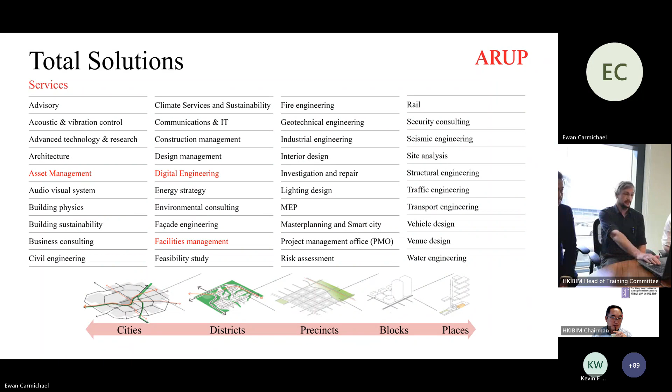But delving into the digital side, we don't just do things in the BIM sphere, we also do other stuff. Just talking about the BIM sphere, we offer services both internally for our projects—BIM manager, CDE setup, managing models—but we also offer our services as a consultancy or advisory service to clients. We've worked with clients to set up their standards and document all their information requirements. So we cover a broad range, start to finish, of projects.

As a BIM advisory team in the region, there's quite a few members across different offices. Ray, who's based in Hong Kong, is the lead. Myself, I look after the Hong Kong office. Wbi in Ho Chi Minh City, Wet in Bangkok, and Edmundo in Manila. We work together quite seamlessly and share responsibility on different projects.

As Kevin said at the introduction, I have been working on Thailand projects. For example, one of the big projects we worked on was a high-speed rail project, which Ray led. Myself, Wbi, and Wet also were BIM managers in different packages of that high-speed rail line. As you can see, we offer quite a lot of services.

On top of this, we have a global BIM skills network, which Ray taps into, and this is where we share global best practice. Actually saw Rishi, who's the Australasia lead, join this call as well—so hi, Rishi. We tend to share best practice, and from that global skills network we disseminate global initiatives, like our global Revit standard and other things. So it works quite like a seamless global initiative.

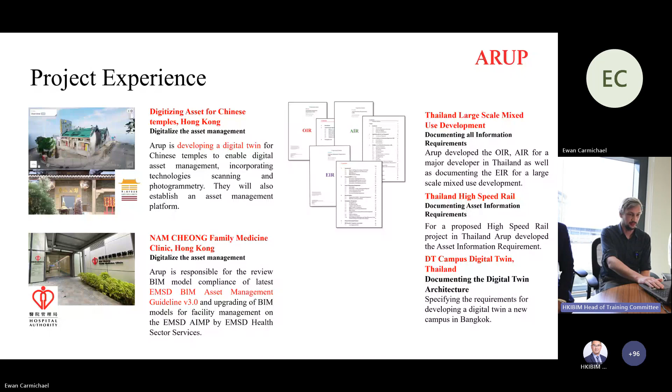For the DT Campus Digital Twin, our client is looking to develop a smart campus. But for that, we need to make sure all the requirements are set up correctly at the start so that all the asset information is passed on into the operation seamlessly and everything can link up. So that's our role in that project as well. We've been busy with regards to asset information for sure.

Finally, I just want to introduce myself. I'm Ewan Carmichael, a senior consultant focusing on BIM. I'm also a chartered mechanical engineer, chartered with IMechE as well as the HKIE. I'm also a professional member of this institute, the HKIBIM, and also a certified CIC BIM manager. As Kevin said at the start, I've been a BIM manager for a number of years now, working on large infrastructure projects, including the BHS APM tunnel just behind me at the airport, but also the Siu Ho Wan depot development and MTR Tung Chung line extension.

But I think the thing in my experience that helps me talk about this sort of stuff is that in the UK, I worked for 4 years on a nuclear power station as part of the maintenance and operations team. So I had firsthand experience of having bad data, not being able to understand what things are or what they're linked to. I will try and share some anecdotes throughout this presentation about where things can go wrong and why, and the implications of not getting it right.

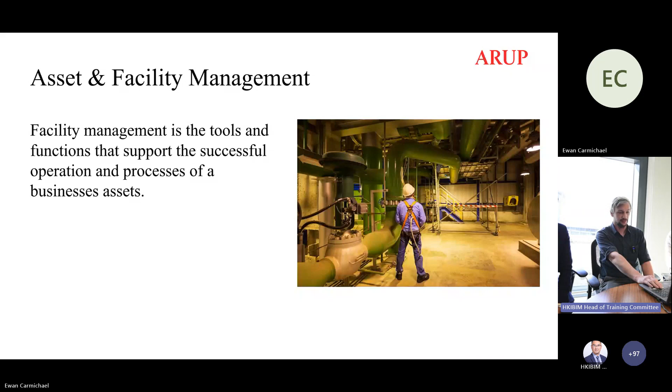To start us off for the actual topic today, I thought I'd start at the reason why this is important, why we want to make sure all these models are in line, and it's to do with facility management. So facility and asset management—the purpose of them on any project or building or asset is making sure it works, making sure things continue to operate as they are supposed to. This can be either hard facility management, like this man inspecting a pumping system, or it can be soft, like cleaning. So there's a variety of different things facility management teams do, but it's a very important role in the operational side of buildings and assets.

Some of the typical day-to-day tasks that a facility management team will carry out include routine inspection of important assets. So things like making sure the pressure of a pump is within range or within the allowed pressure range. That's the sort of thing they would do on a day-to-day basis. They would record this and store it in a secure way.

But they also carry out routine maintenance. Every piece of equipment will have a manufacturing spec. In that spec, it will tell you the seals, the fan, or certain parts of an asset need to be maintained at a certain frequency. This will be associated with a working schedule for the maintenance staff, and this is where spares come in as well—making sure your spares are in line and available for when that maintenance happens. So it's quite a lot of interlinking operations, and it's quite important to get it right.

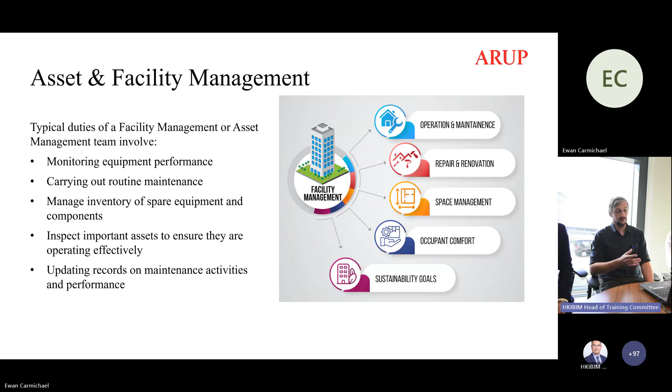So what was it like back in the day? My role on site was about 10 years ago, so it was kind of halfway to becoming digitized, but I still had to go into the archives, find the shelves of binders where drawings, specifications, and operation manuals were kept. But it did highlight to me some of the problems with it, in that you have a lot of different documentation produced at different times by different people, and sometimes the naming convention doesn't follow through. So you'll have pumps named 4 times in 4 different pieces of documents, and they're not linked. So it's very hard to specify work efficiently because you don't know which piece of information is correct.

Another thing you'd usually have to do back in the day, which you still do now but more manually, is checklists. So when you go on site to inspect, you have a checklist. You check things are right, check things are not right, and that gets filed in one of these binders. But the problem is, if a piece of equipment is bordering on the tolerance of its operational performance, if that happens one week, it's recorded and put in the binder. Next week, the same thing happens when someone else does the same check—that gets put in the binder. Third week, same thing by someone else.

And then the fourth week, catastrophic failure. So the whole point of digitizing allows all that information to be gathered, and you can see trends—you can see why things might have a failure. And this is what leads us on to things like preventative maintenance. I'll talk about that a bit more, but this is the thing we're trying to improve by digitizing assets, or digitizing the facility management process.

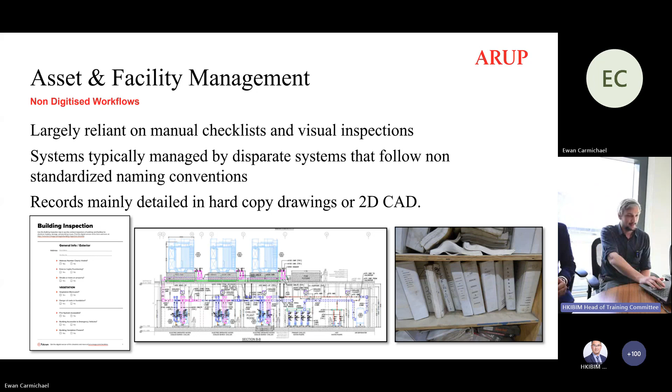But what is a digitized workflow? So the project or the work I did on site, that was half digitized. They'd copied a lot of the manual entered stuff, the drawings, into an online facility management system.

But what I want to try and promote at the minute is something that's completely digitized, something that was set up from the start, that has a single source for every asset in the database. So you have a database of all your assets, and all the information is associated with that, including drawings, specifications, maybe hyperlinks to other storage locations. But that's much more clean and much more easy to use.

Then you get to digitized checklists. So workers on site with an iPad checking off inspections, so that you can amalgamate the data, as I said before. You can see insights, you can see trends, and you can make more informed decisions. You can even automate the interventions by stopping plant if you know things are going to go wrong.

And then on top of that, you can have IoT sensor data telling you at any time how different systems are operating together. This is when we get into digital twins and even smarter maintenance platforms, and I will talk about them later. But that's where we want to aim, and that's why we try and digitize the information up front when we're doing our design and construction, and that's what gets handed over.

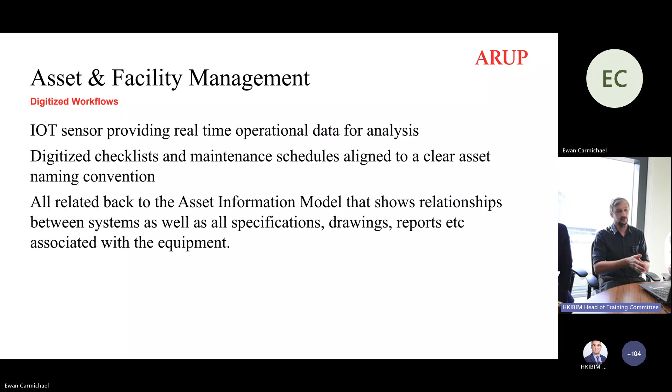So I have an example that I'd like to share from EMSD. So let me just share a different screen. It wouldn't let me embed this video, so it has to be here.

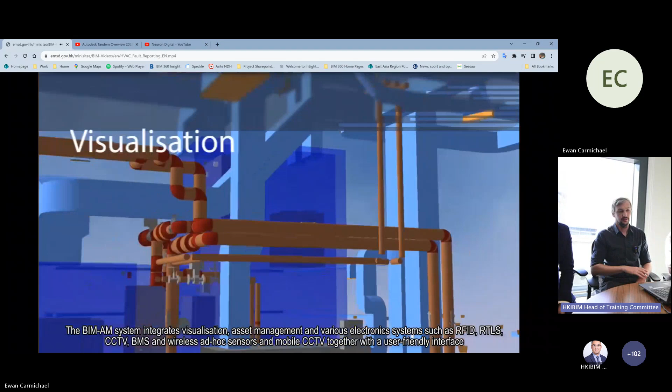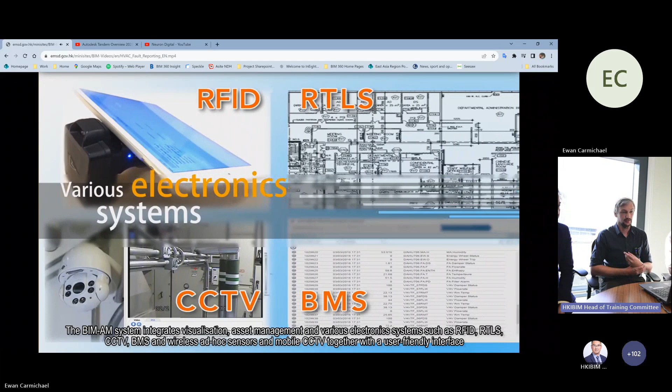So this is the EMSD BIM AM system. I quite like this video because it shows the before and after, and it allows us to see the difference between a half digitized system and a digitized system. But basically their goal is to try and digitize all their workflows, and they have a system set up to upload all this information into the cloud. All of these things are meant to be connected at the end.

So just skip to this. This is an example of the fault reporting, handling, and monitoring process. This is where an operational staff member goes to site, finds a problem, and reports it.

So your facility maintenance staff notices, during a site walk of the facility, that one of the HVAC systems is not working. Previously, she'd have to phone up the help desk. They would record the information, but now because everything's digitized, she has everything to hand. So before, when she phoned up, there might be an error in telling her what exactly might be wrong. Now it's all either voice input, or you have much more standardized faults, things like this. So it all becomes a bit more seamless.

Fill in all the information, take a photo, so there's more clarity of where the contractor will eventually have to work. This is then passed to the same sort of staff, but now it's all digitized. It's quite clear, and it can be automatically assigned to different rooms for different contractors to work on. Whereas before there was a lot more manual input and then a fax to job assignment for the contractors. Then the job assignment person would phone the contractor to assign him to the task.

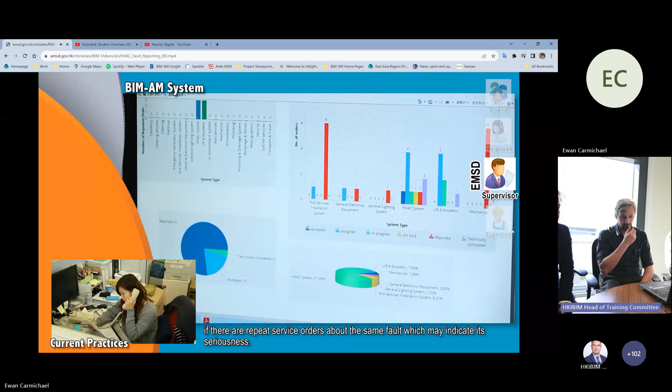But with a digitized system, like I said before, you can check analysis, check trends in certain systems that might be failing more frequently than others, and you might be able to find the root cause of that problem. And then also it gives a bit more transparency. The system allows the facility maintenance staff to understand whereabouts in the process their request is, so they can understand when it might be fixed, who's assigned to it, and the status of the job.

So yeah, basically this is a fully digitized asset information system, and everything will be assigned to specific assets in the cloud. Let me just go back to my slide deck.

So we talked about the why, but I guess the question now is, how do we get the asset information from our design construction models into after handover onto the facility management? The tool we use is the asset information model. It's a collated set of information gathered from all sources that supports the ongoing management of the asset, so anything required to maintain and operate has to be in there.

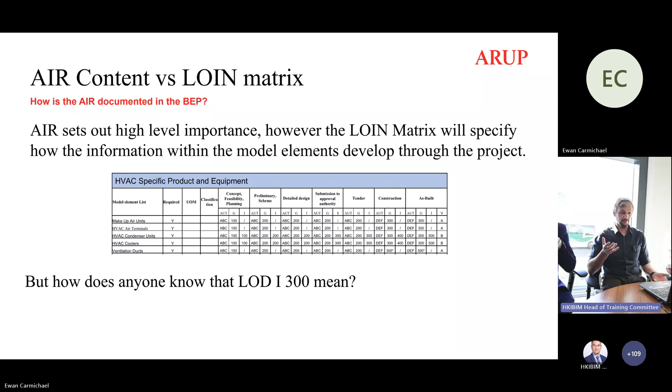Take the example of the HVAC coolers. At tender, LODG is 200, LODI is 300. Now, LODG is a more understood term in the industry than LODI. Most people understand LODG 200 as an approximate shape, approximate location, but in the right system or something like that. But LODI 300, what does that even mean? There is a sample in the BIM standards of what an LODI specification could be, but I've seen these

copied and pasted into BEPs before, and they are not specific for projects, so they're not very useful. For example, the HVAC coolers LODI 300 specifies that the Omni-class code title and version need to be applied to the elements in the project. Now, if the project or the client isn't even using Omni-class, what is the purpose of filling it in? It's a complete waste of everyone's time and money.

So my recommendation is if this is applied or this is in a BEP, challenge it. But also, if clients want to make sure that things are right for their uses of BIM, be it quantity takeoff, carbon assessment, operational information, then make sure this is filled in. You have an LODI specification that makes sure you get the right information at the right time.

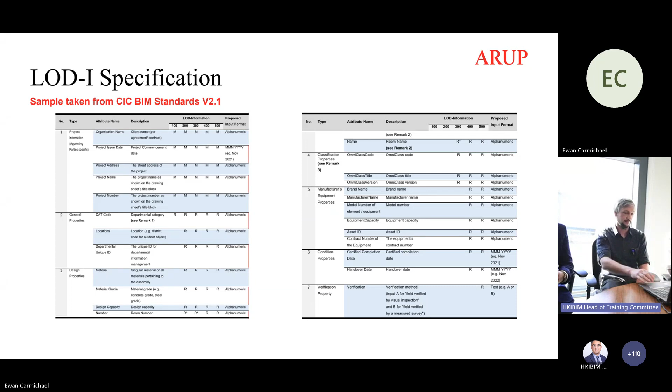I'd like an example from EMSD that highlights another wrinkle in this. In the EMSD BIM asset management guidelines, specifically Appendix E, it goes into detail about how Revit elements or Revit families should be put together for certain assets, for different things, but for this example it's the air handling unit. It specifies that different components within the air handling unit should be separate families - your energy recovery, your cooling coils, your fans, your filters, this sort of thing.

But that should also be reflected in your LOIN matrix, so that you can define exactly when the information gets expanded on. Because ultimately, this might not need to be done within the design phase - it might only be that the contractor needs to pick this up. So you can use the LOIN matrix to communicate that to the different teams. You could also, for things inside the machine, possibly use families that are only 2D information, but have an LOI that's appropriate for asset management. So there are various ways you can get around it.

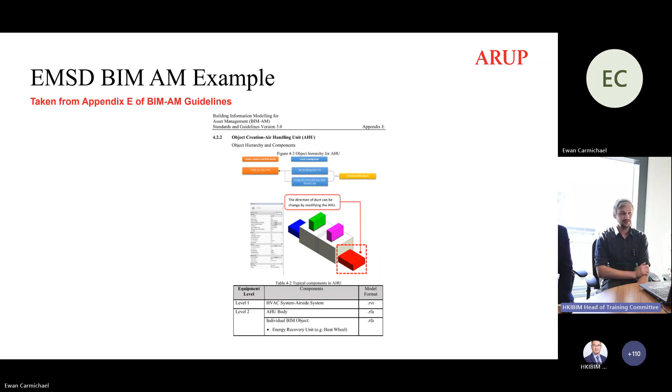But as I'll get onto, the EMSD guidelines are quite specific about how they want things to be built. On the flip side is the ArchSD's BIM guidelines - again this is version 3.0. They have a similar asset management requirement.

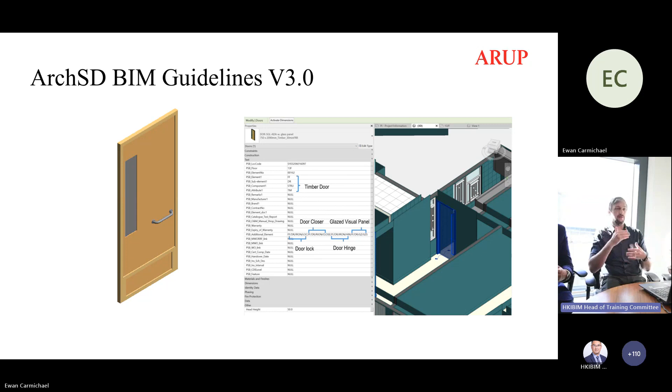And so when you break down a door, do you need to record an asset code against the door handle, the glazing, or the lock? According to the ArchSD's guidelines, this information can be added as parameters - asset information - rather than a separate asset in its own right. I like to think of this as a good counterpoint for when you're specifying asset information requirements - have a think about what you specify as an asset. Do you specify your air handling unit as one asset, with parameters that specify the different components? Do you split it up into different assets and different families, or do you do what this door example does, and just have one asset with a multitude of parameters?

Obviously a balance needs to be had, but you also need to have an idea of what your teams maintain on site. Is the fan inside the air handling unit important enough that it needs its own asset number, so that you can record maintenance or operational performance against it?

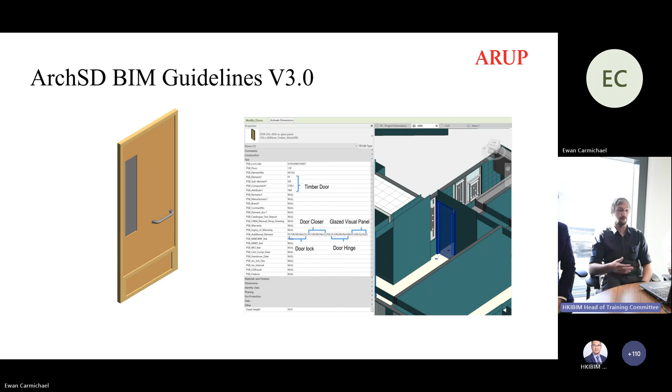So there's something I want to cover now. It's quite a common thing to see when talking about asset information management, and it's COBie. And no, it's not this guy. It's actually got nothing to do with him. It's this: Construction Operations Building information exchange.

So this is a classification system for assets that was developed by the American Army when they tried to understand their entire estate in terms of what they have. Because it's very, imagine the size of it, they needed to have a system, so they developed COBie.

The problem with COBie, or the problem that I have with COBie, is the way it's specified on projects, because people just ask for COBie. They don't tell you what assets you actually need to apply COBie to, to get the best out of it. So as I say here, it's not a replacement for an AIR. It's a good classification system you can use in an AIR, but it cannot be a replacement of it.

But to go a bit further into client responsibilities, we've worked with a few clients on this sort of thing, about when to specify AIRs. And quite an important thing to consider is the timing of the AIRs, because in the projects we work on, a lot of the time when we have the kickoff meetings, they say, okay, we want you to write the AIR.

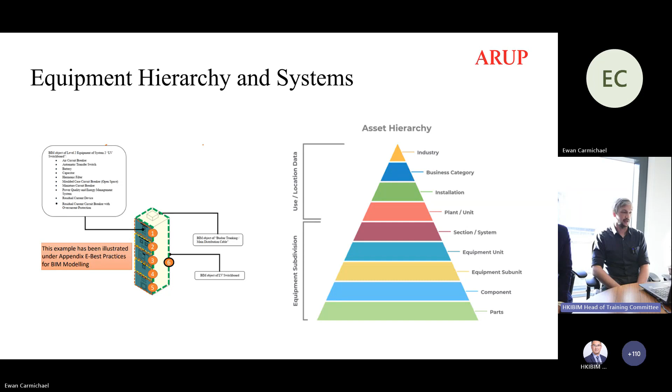So at this point, I'd like to talk through the EMSD guidelines. We've worked a bit with it, and I want to try and share some experiences and some things to look out for if you have to align or produce models in line with these guidelines.

So version 3.0, it was released, I think, last year - 2022, sorry. And it covers a lot of things, like modeling standards, asset relationship instructions, and asset information model upload instructions, as well as all the codification and classification things you would expect. Some things to watch out for.

The system configuration has to be set up with your folder structures so you contain all your information, that you zip it all up and upload to the system. It all has to be in line with what they say, otherwise it doesn't go into this thing called the Asset Information Management Platform. It's quite a specific way they like to organize it, and information gets shared amongst different platforms as well. So if it's not right, things might go into the CDE correctly, but then it might not get taken out into the other systems correctly. So they're quite specific about it.

Also, the Revit families, as I said before, they are quite specific about the way Revit families need to be, and for most things they do consider assets at a sub-component level. So for the AHU, you have to have Revit families for different things. For the electrical panels, you have to have racks as individual components. It might make sense if you think about it, because in the racks there might be different components for different systems, like power and comms. So it makes sense, but it's very rare that you see a model built that way. Something to keep in mind.

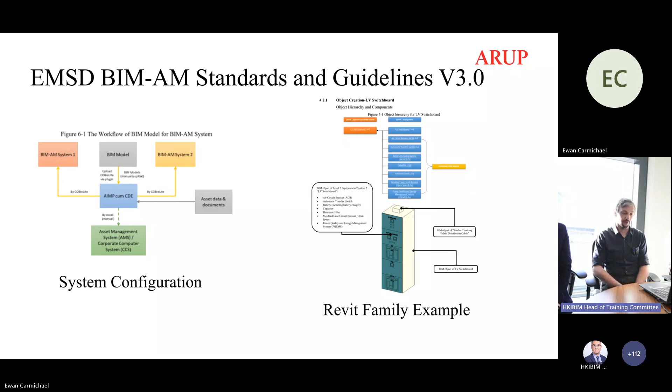So I'd like to discuss the difference between the project information model and the asset information model. A lot of times when we get to the end of projects, it's not really specified what needs to be handed over, so everything just gets dumped and handed over. Whereas what should clearly define the difference is: the PIM is all about what they need during the project delivery phase. So this might be your native models, your calculations, drawings, and things.

Once that's handed over at the end, it's still a project information model - it can be archived and reused if there's any A&A works, for example. Whereas the asset information model should only contain information in relation to the operation phase of the asset. That can include 3D information - it doesn't have to, but if you give a Revit model that has all the asset information in it, whose responsibility is it to strip out the relevant data from that model to use in your systems? It needs to be clearly defined up front in the asset information requirements and the exchange information requirements - what is the format of the handover information for both of these? Otherwise, you'll just end up having to do rework yourself to get it into the system correctly.

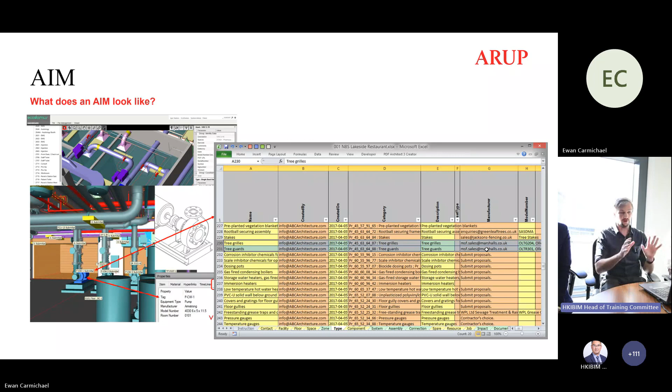So what does the AIM look like? I'm sure you've seen sort of gimmicky 3D model perspectives where you click on equipment and it pops up all the asset information, all the specifications. That is an asset information model, but it doesn't need to be like that - that's not the only variation. It can just be like you can see here, which is a database, just a list of assets and their associated information, as well as hyperlinks to specifications or whatever it might be. Both are an asset information model.

Yeah, and as I said, it doesn't have to be 3D. It doesn't even have to be 2D - it can just be asset relationships in a database. But the important thing, again, is it has to contain all of the information that's required to maintain and operate the asset.

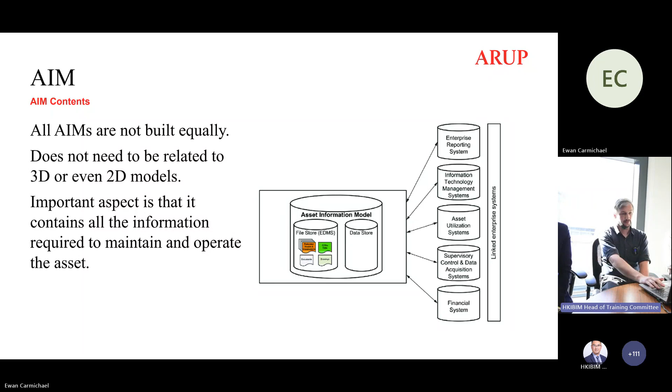One of the reasons why I wanted to do this talk was to talk about the golden thread of information. This term came out because an independent review was conducted after the Grenfell fire in the UK—72 people died when a tower block went on fire. During the investigation, they found a lot of the information that should have been maintained, regarding material properties of the cladding, fire, and the state of the fire extinguishers, wasn't recorded or kept. So people living there didn't have access to this information, and neither did the emergency services.

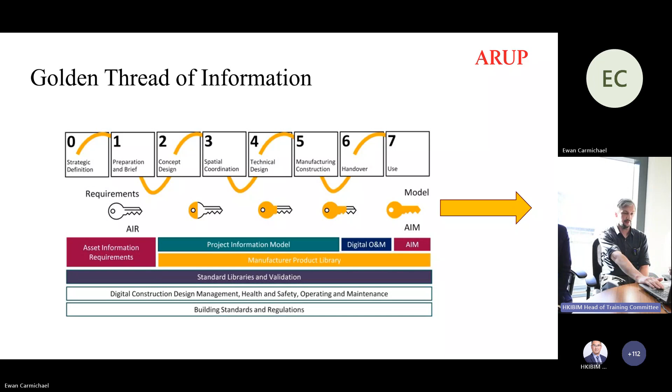This is just a diagrammatical representation of the golden thread of information. So after the model is handed over, the information should still grow along with the changes to the asset information model.

Just to clarify a few points about responsibilities: the client is responsible for documenting the AIR pre-appointment. Obviously if there's not enough information, they can redo it for the pre-handover stage. They can delegate this out, contracting someone to write the AIR for them. Then during the pre-handover stage, the delivery teams are responsible for updating the asset information in the models, in line with the LOD specification, so that the handover is successful.

The client is also the responsible party for checking the information in these models is accurate. They can obviously delegate this out. We've done this role as BIM auditors on projects, and it's a very onerous task—I don't think it should be taken lightly, and that's why I highlight it here. But if you get handed over a model as the client and you don't check it, and then try to load it into your system, the contractor's gone, and you're left with a bunch of information that's not very useful to you.

Then during operation, again, it's the appointing party's responsibility for the upkeep, maintaining this golden thread of information. Any alterations to the asset information model can be done by the owners and operators themselves, or it can be contracted out again. That becomes the PIM, and they update it and then hand it over, and that can become the AIM again.

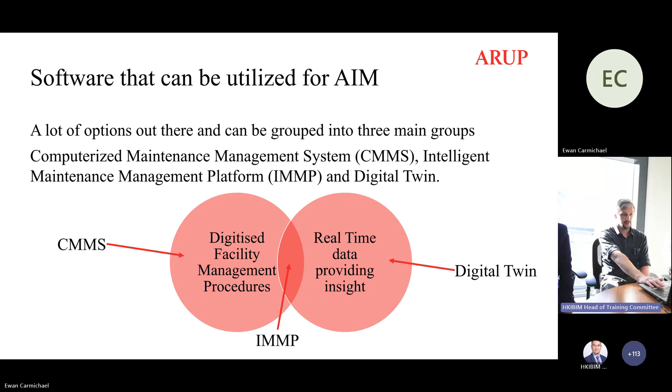So it's just a diagrammatical way of representing them. I'm just going to talk about a few platforms now.

EcoDomus, I'm sure a few of you have had experience using. They've only recently been bought over by Siemens, which I didn't realize until I started preparing this presentation. Essentially, it's a digital twin platform, but it does have good interactions with CMMS systems - the APIs talk together quite well.

You can upload BIM models, IFC models directly to the platform, and it does accept COBie data structures as well. So it's quite a useful platform if you want the 3D visualization.

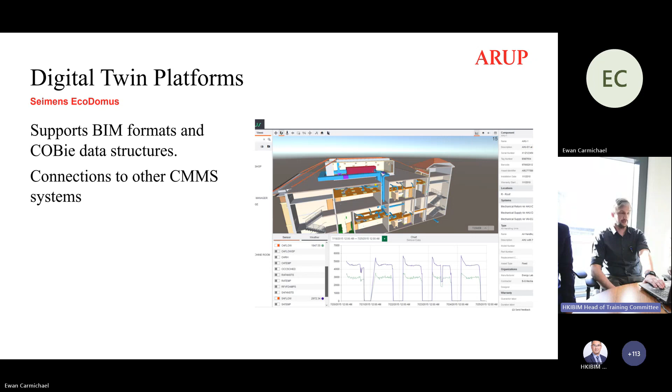Other platforms include Autodesk Tandem. Being an Autodesk product, it's very good at handling things like Revit, also via BIM 360. So it's quite good at

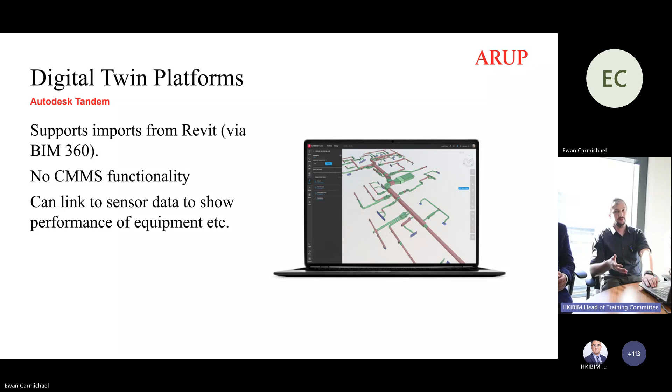accepting those sorts of information, but it doesn't have any CMMS functionality, so it's hard to use it as a facility management system. It possibly can be used as asset management. But they have recently linked it to operational data, sensor data as well.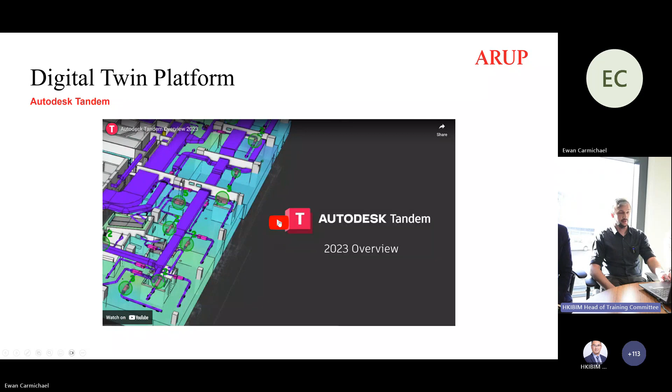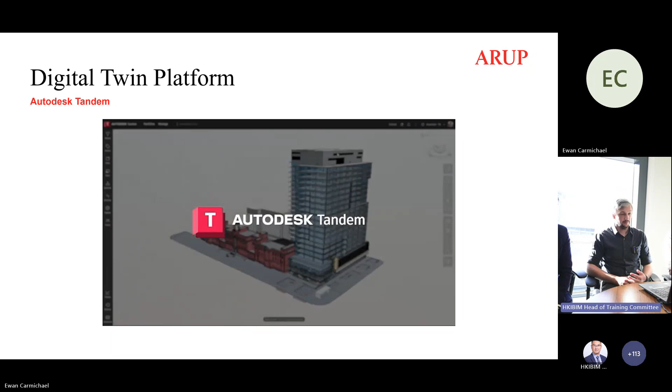Just a quick overview of what it can do for those who don't know. For those who actually have the AEC license for Autodesk, this is included in it, so you can upload models and have a play.

It's quite good. If you have classifications built into your BIM models as well, it's very good at filtering through and understanding how many doors you have and what sort of doors you have, this sort of thing. It's quite an easy sort of filter for assets.

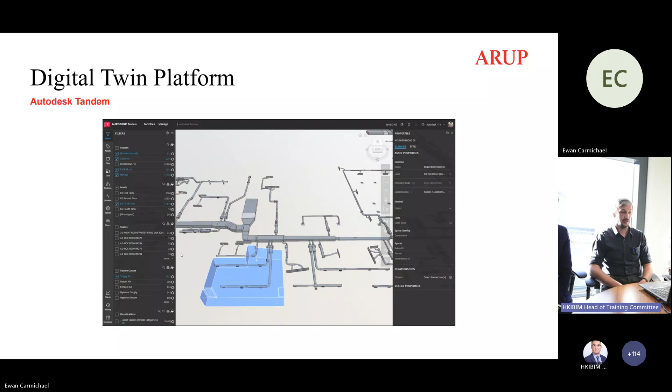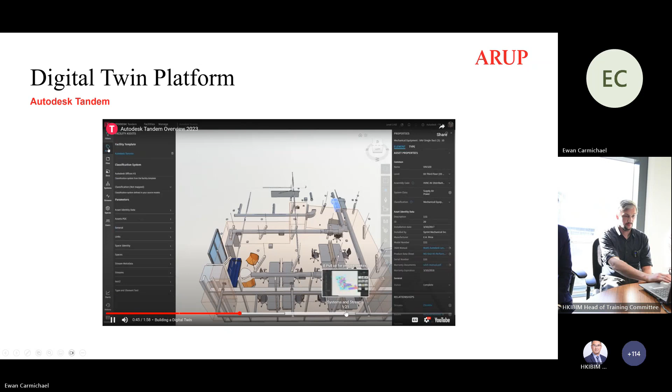But then we skip to the end - we find that they also have links to IoT sensor data. It'll heat map temperatures, it will heat map occupancy, it'll do this sort of thing. So it can be used

in addition to some facility management systems. So I think it's quite a good tool, but if you're wanting a full facility management tool, it doesn't quite go that far.

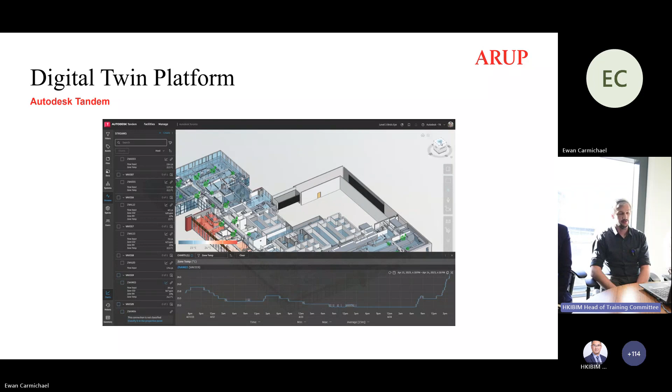Can you hear me now? Can you hear me now?

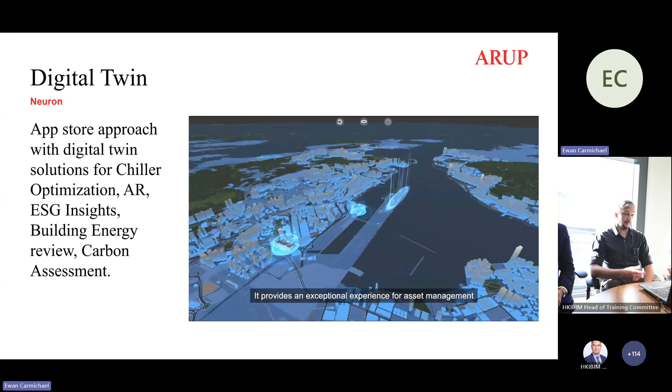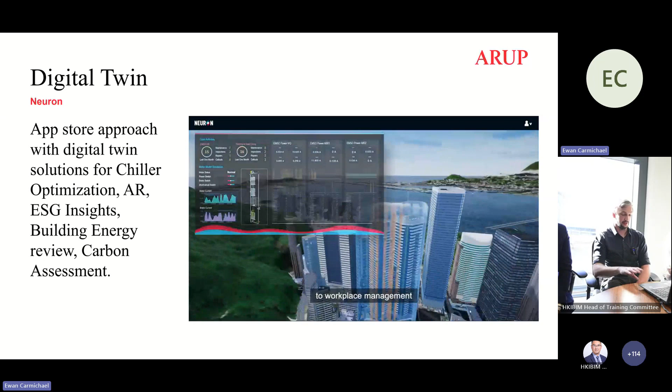This is good, sorry, just to interject for that - if you are a client that wants to look at things as a portfolio, it goes down to what becomes an asset. If your asset is buildings, then that's what you need to document in your asset requirements as well. Sorry, it just came to me there.

Yeah, the rest is pretty gimmicky stuff, but it's quite a powerful platform. I think if you're looking into these sorts of things, it's well worth an investigation into.

And it kind of leads me on quite well to my last slide about sustainability. A lot of the examples I've given about carbon footprint and all the rest of it try to highlight the fact that a lot of the reasons why we do all this stuff is to improve things like, or start doing things like, preventative maintenance, understanding the energy usage of buildings and assets so that we can make it more efficient. And that all leads back into sustainability.

But to do this, again, it needs to be stated in your OIR, the AIR, and that will feed down, cascade down into the delivery teams and then into your operation.

So just to quickly summarize: always start at the operational objectives from the client side. If that's set out clearly, the high level objectives are clearly defined, then everything else is straightforward. Make sure all stakeholders have their say, so make sure you talk to everyone, including your facility maintenance management people.